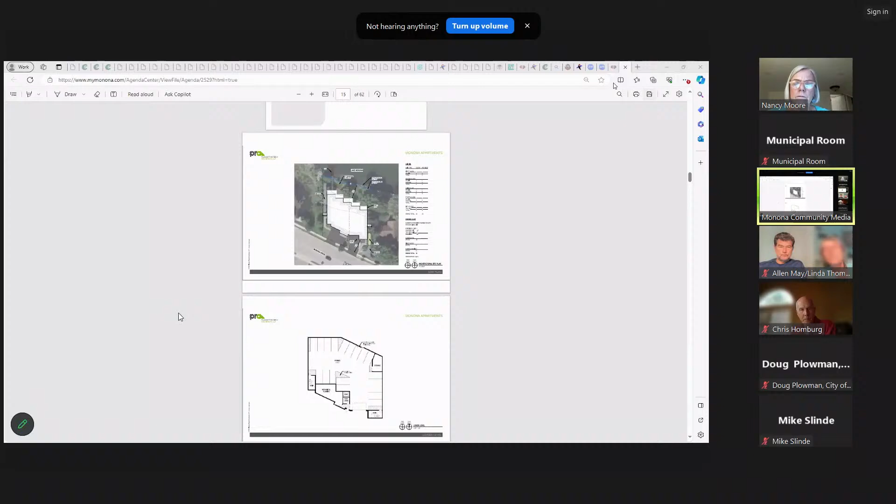Thank you, Doug. So as requested, here's the site plan established for the site preliminarily. As referenced off of Monona Drive, there are 2 drives leading to 2 different parking areas, 2 exterior parking spaces, and facing the lake would be a series of outdoor patios for the units, balconies above, a pier, and some outdoor space like a fire pit. The exact design of that is still to be developed.

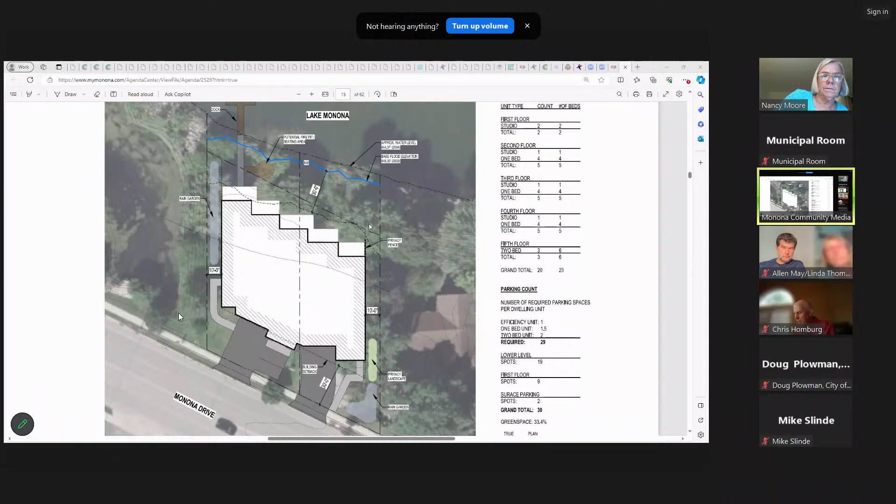Doug, if you could go to the next page, please. Thank you. The lowest level of the proposed building is predominantly parking, with some building storage, and also space for mechanical, plumbing, and other equipment needed for a building of this type.

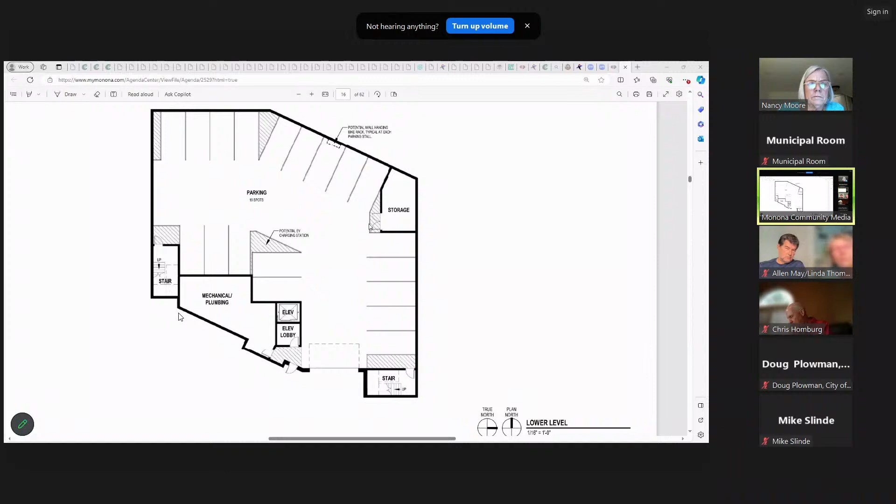The first floor, or street level floor, would consist of a couple studio units to the north, additional indoor parking spaces to the south, along with an amenity space we're calling kayak and paddleboard storage. There are also areas for dumpsters, a lobby, and a small fitness area as amenity space for the building.

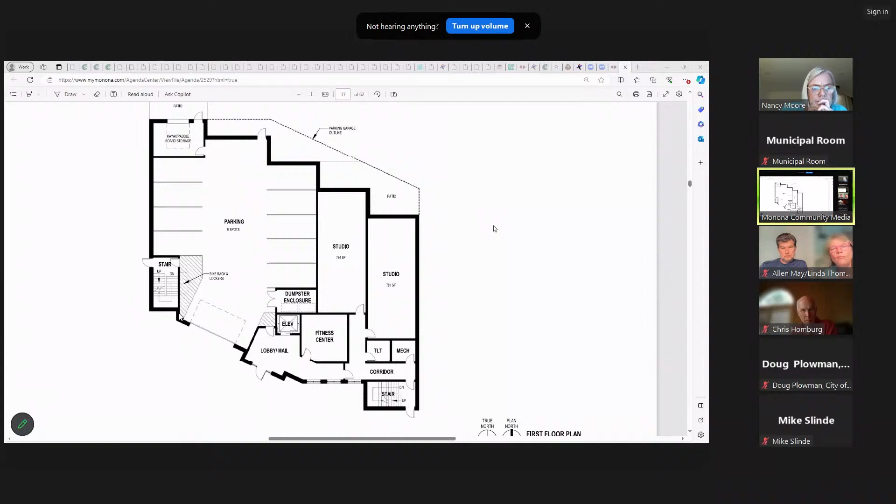The unit mix varies on the upper floors, with an additional 4 floors of units, some having balconies facing the lake. There's also potentially a roof balcony that may or may not face the street. The 2nd through 4th floors are identical, and the top floor would have larger units, 2-bedroom units with larger balcony spaces.

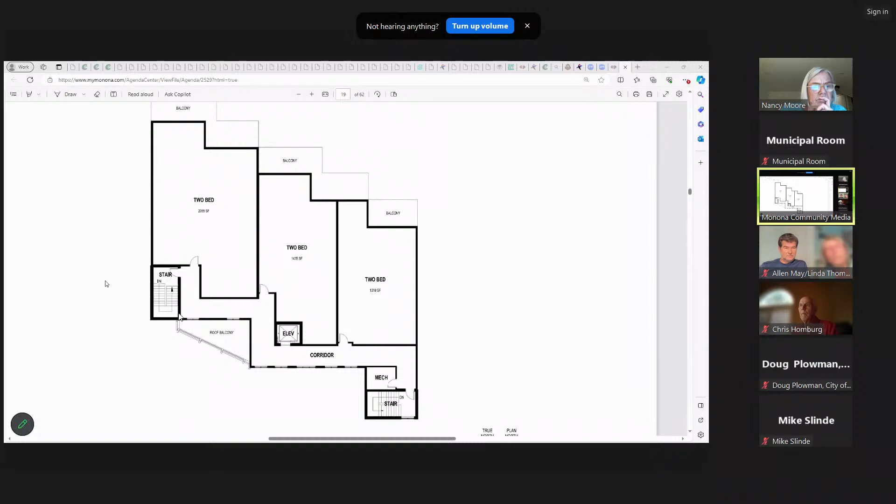The only other thing assembled for this preliminary hearing is a conceptual elevation of what the building might look like from Monona Drive. That would be the front or street elevation you're seeing on the screen now, a mix of materials from brick to composite siding to composite panels.

The design of the building is, I think, contemporaneous with a lot of the other apartment buildings in the general neighborhood. We've considered the Monona Drive guidelines when establishing this design, trying to create something harmonious with the other similar developments both up the street on the lakeside and on the non-lake side. Overall, the building is roughly 55 feet high from the street. Other than that, I don't have anything else to add.

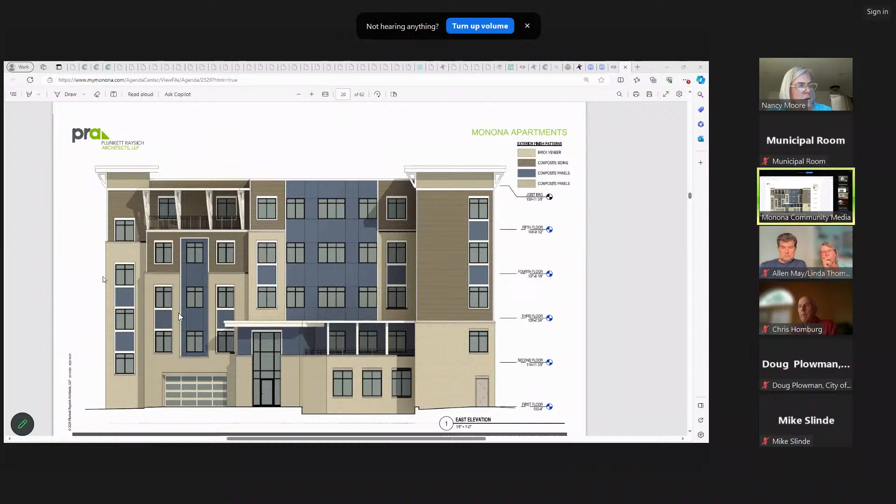And the 55 feet you referenced, could you share how that compares to the other multi-family units nearby? I don't have exact height information on those developments, but there's a condo building maybe 3 parcels up from this one, and we are shorter than that. Then there's the apartment building maybe 1/8 of a mile up from there, and we are taller than that. It's about the best I can offer.

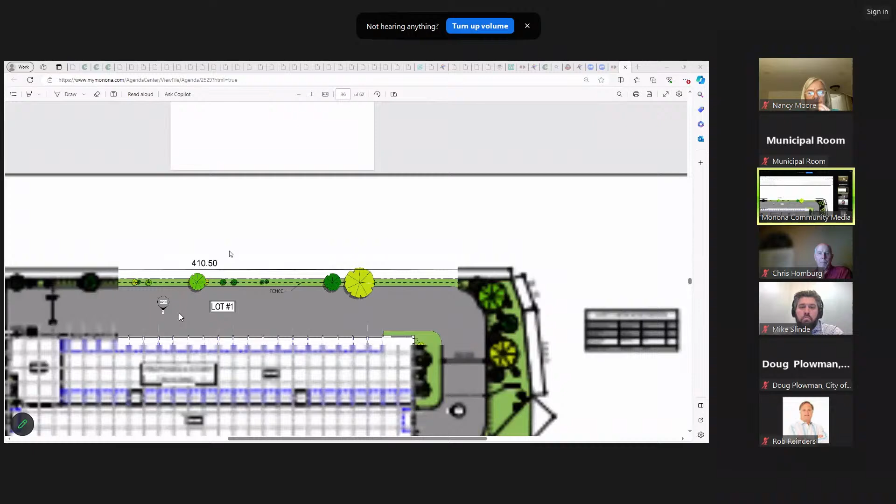So we are working on that site, the Meritor site at 1350 Femrite Drive. The building itself is 51 feet high, and the level of architecture was meant to go along with what we have at Meritor. We'll get into that in a minute. We have some examples of what it can look like as well.

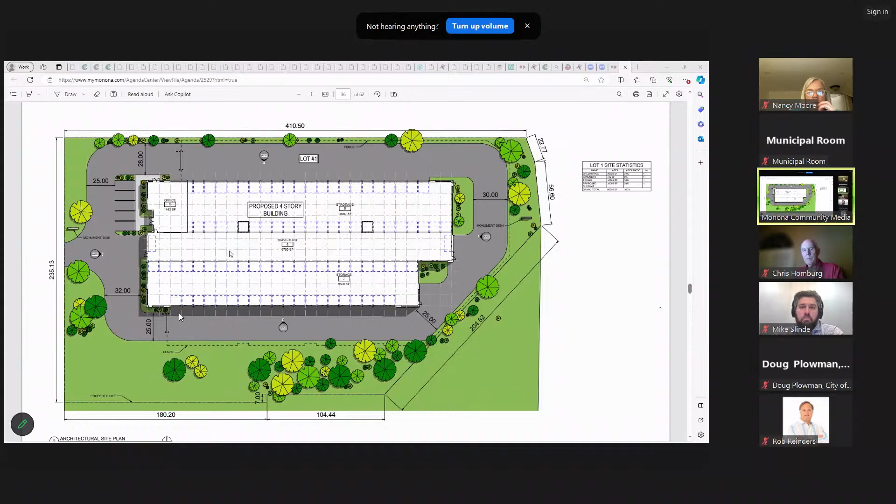I also want to mention there's a city-owned lot adjacent to this. We approached the city to say, what are you going to do with this? Is there something we should all collaborate on? And the discussion was, yeah, why don't you look into it? And we did. Through the county, they have an easement in there, and at this point, until the Highway 51 corridor is resolved in their minds, they didn't want to work with us to utilize that land. It was just another parcel there that was kind of wasted. But by the same token, we were sensitive to the trees and the whole setup there.

So anyway, I did in our submittal answer a lot of the questions that Doug has in the presentation, so I think we'll get to that during the question period. To Bert's point, on the site plan here we're only showing the physical property line, and we're at 31% green space in this design. You've got an additional right-of-way, former Femrite, extended to Highway 51 that's going to sit there as green space. I'm not going to say for perpetuity, but it's not a very large space you could develop on anyway, so it's kind of a bonus green space, for lack of a better term.

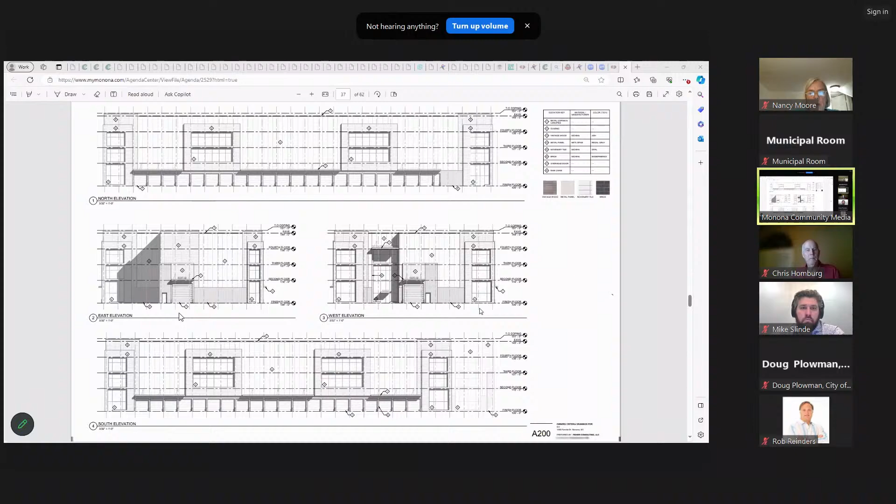If we go down, Doug, these are the elevations. We're in an enviable position to make this look pretty much any way we want, so we're certainly open to suggestions, and I'll give you some examples as we go down here if anything really jumps off the page. But this is what we're starting with. And if we go a little further down, you'll see we put some renderings for you.

These views show the direction we're looking, so in the lower corner you know we're looking west. We took time pinpointing the existing trees on the site, both along Copps and along the vacated right-of-way. They need a lot of cleaning up, but there are mature trees here, and we tried to fashion the entrance in line with the way the trees are separated now. We really try to pay attention to being environmentally sensitive to the site as much as we can.

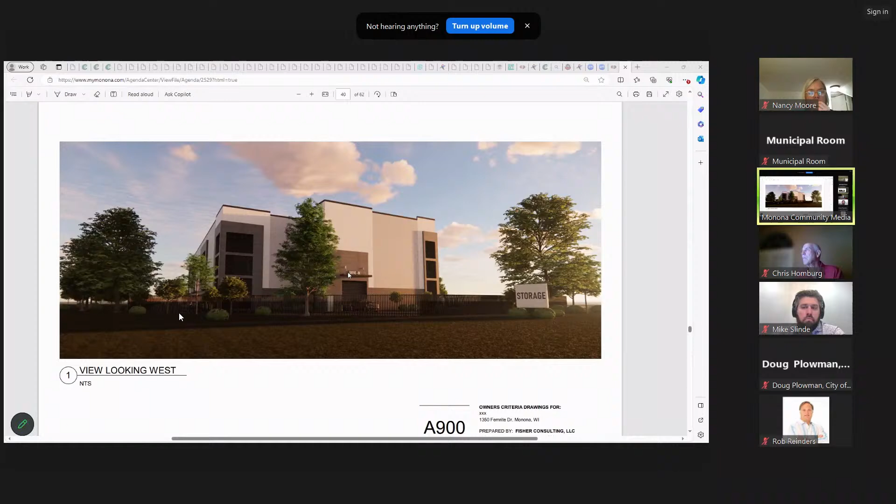A couple more views. This is looking north, kind of from the Meritor site. And the next one should be the corner of Femrite and Copps, as you hit that intersection.

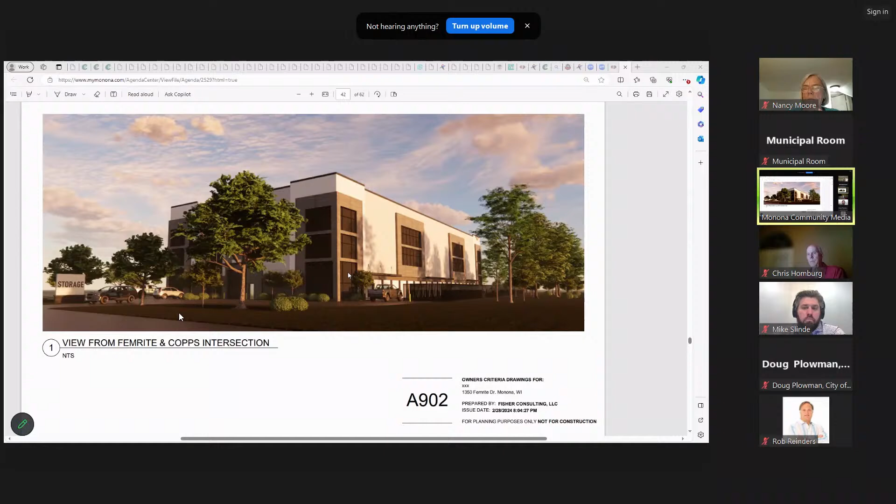We do have materials on the elevations in your packet. We're utilizing a combination of brick, cement board panel, metal, and insulated metal panel, and we're trying to keep the colors neutral. We're not trying to burn out anybody's eyeballs with tangerine orange or anything like that, so we really are trying to be sensitive.

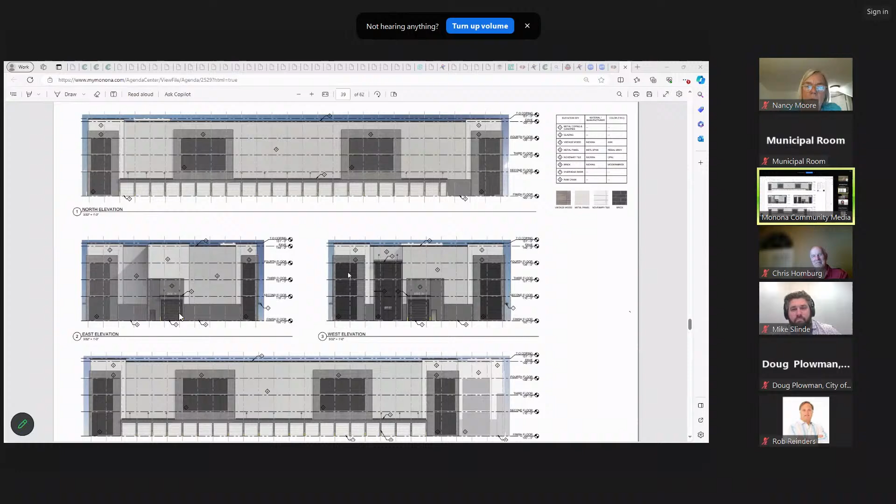If you want to go all the way down to Exhibit C, we can skip by B. Here's just some examples of the types of facilities we're talking about.

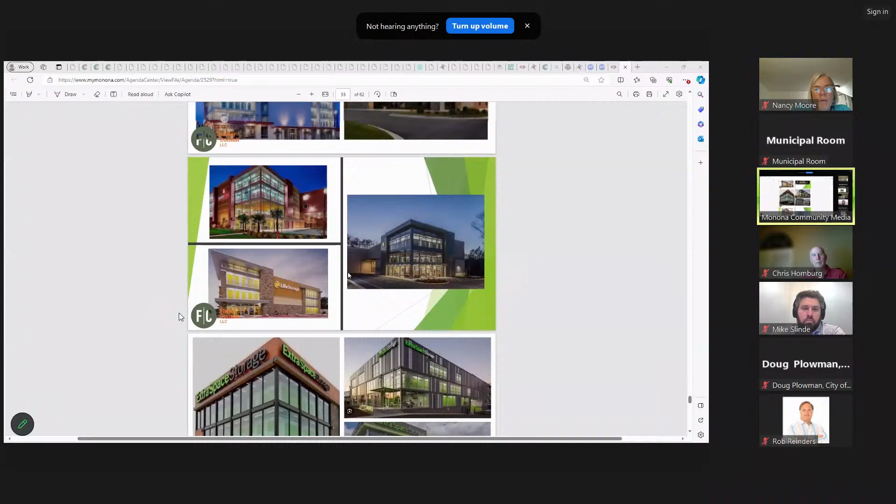I want to mention that in doing presentations across the country, Wisconsin is unique in that self-storage is almost always found to be an approved use, or at least a conditional use, in an industrial zone district. Given what the product is, and as Bert pointed out from the facility across the street, they just seem to fit there. Over time, like Bert said, down in Arizona, Florida, Georgia, Arkansas, Illinois, these facilities show up in commercial spaces. They show up in high-density spaces because that's where the people are that use them.

While it's storage, I think it often gets confused with warehousing. What we're looking at is a facility that might have 750 units, and every single unit that's rented is a transaction—a retail transaction. Somebody's renting space. So to be fair, this is more of a commercial retail use in its current configuration, which we call executive storage, especially when it's all climate controlled, than what you'd typically expect storage to be. I run into this a lot—when people hear storage, it's like fingernails over a chalkboard. I'm not going to lie, I run into it all the time. So we really want to take a little extra time to talk about that.

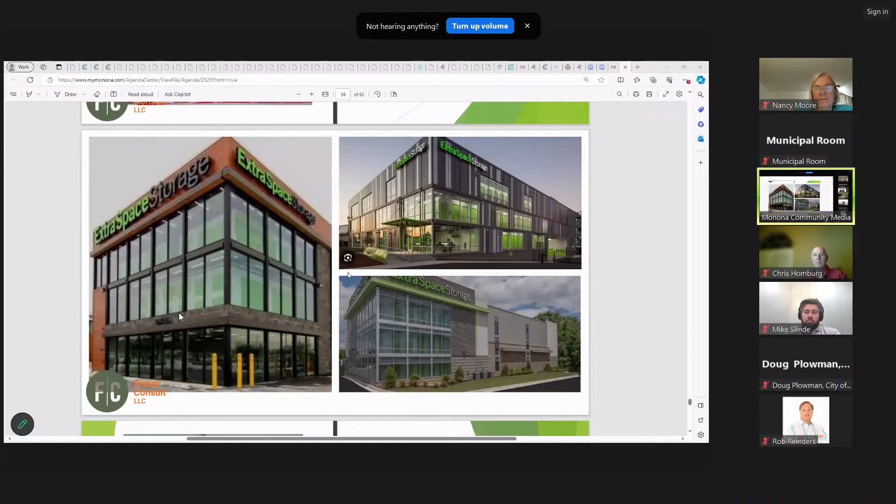That was one of the big focal points we raised with Brian from the get-go: we are going to be Meritor and Unity Point's neighbor, and we want whatever we have here to really fit. We also envision a whole different tier of customer than what's typically found in other storage facilities.

As we go through my narrative, we talk about the different uses for storage, not just limited to personal storage. The last thing I'll point out, and then I'll be quiet for a while until you have your questions.

Self-storage—the other misconception over time is that you need a lot of parking for self-storage. Self-storage, especially of this kind, has an interior drive-through the full length of the building, 25 feet wide, with interior drive aisles. When people come, they drive up to their unit. They don't park and get a cart and walk 100 feet to their door—they go right to where the door is.

When these larger facilities go up, during initial rent-up, when we try to hit stabilization, it could take up to 3 years. During initial rent-up, the average hourly traffic impact is between 4 and 10 cars an hour, so it's not a lot. And when you get to stabilization and everybody's in their space, it drops to 3 to 6 trips an hour. So it is not a high trafficked location.